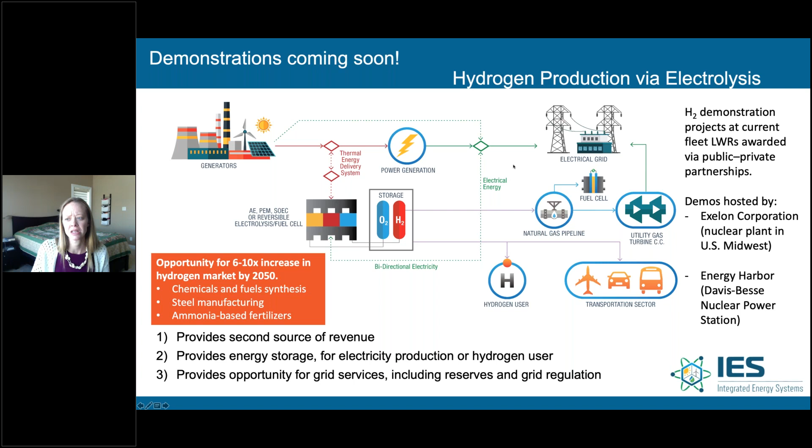So I hope that you are encouraged by that and that we will be able to hear lots of exciting things throughout these presentations. So one thing I want to start is thinking that what our energy systems can provide is really quite different than what we do today. Nuclear energy provides a vast amount of clean energy today. In the US, nuclear energy provides 55% of the clean electricity in the United States, but it can do so much more. We can bring that abundant dispatchable energy into industrial applications as shown here on the right.

We can bring that to production of clean water and make a desert oasis, or it can be taken to remote applications or regions that need energy but don't have ready access to the standard grid, don't have ready access to a number of different facilities that rely on diesel shipments from time to time. So I invite you to open your minds to that in how we can think about energy system planning in the future and how nuclear can and should play a role in that.

So with no further ado, I'd like to introduce our first industry speaker who will open this session on nuclear industrial integration demonstrations. I'd like to welcome Dr. Ugi Otgonbaatar, who is a corporate strategy manager at Exelon Corporation. Ugi joined Exelon in 2016, and since then he has been working for Exelon's corporate R&D partnership program, focusing on early stage energy technologies, including clean hydrogen generation, energy storage, and technologies for repurposing the existing nuclear fleet. Ugi holds a bachelor's and PhD in nuclear science and engineering from MIT, with research experience in thermal hydraulics, computational materials science, and he's previously worked for R&D groups at EDF, General Electric, and Tokyo Electric Power Company. Ugi, I'll hand it to you.

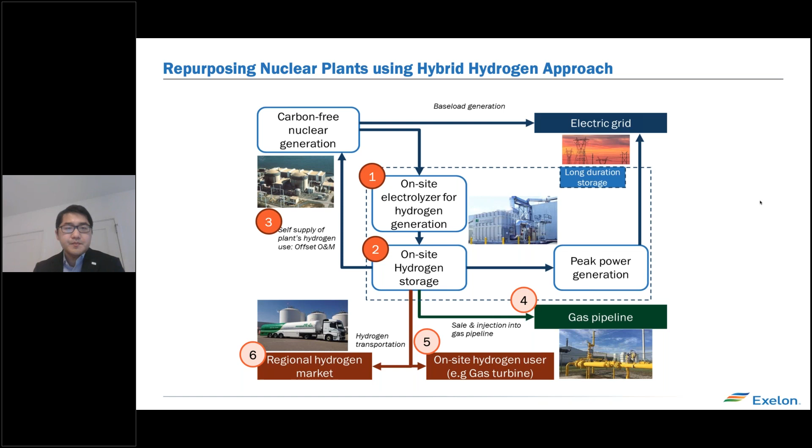So yeah, we have taken some steps to explore this vision. So number 1, 2, and 3. So I talked about self-supply of hydrogen. So what we are doing, with DOE funding and 50% cost share from DOE EERE, and working with this company called Nel Hydrogen and 3 of the national labs, we are installing a 1 megawatt electrolyzer at one of our Exelon units. So that project is going along very well, and we are getting close to site selection at this point.

And Shannon asked me to touch on safety. So again, we haven't selected the site, but based on preliminary analysis, it looks like the amount of hydrogen we'll be adding to the site is going to be minimal because the electrolyzers don't store a lot of hydrogen. So right now, the current strategy is to design the system such that we don't need a license amendment review from the NRC. So that's our current strategy, and the unit is expected to be running in 2022. Next slide, please.

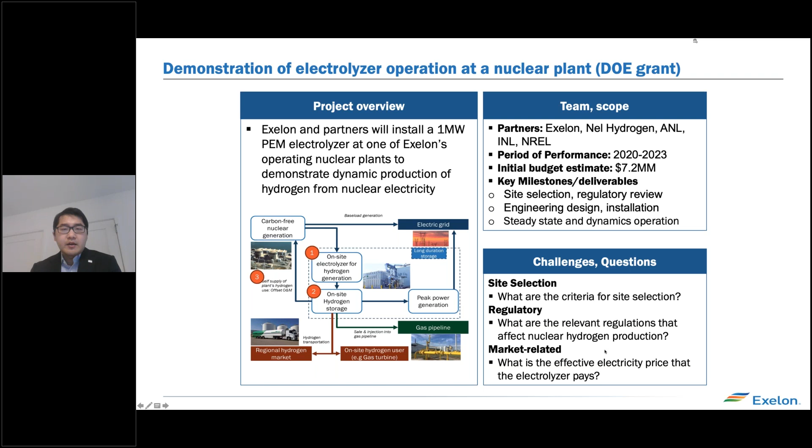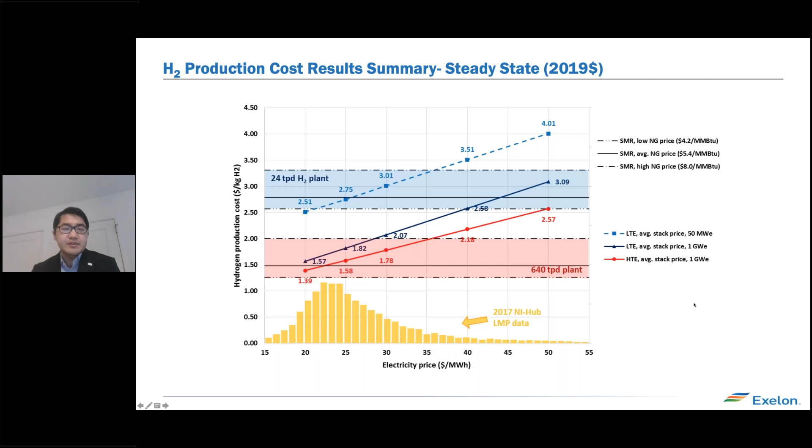Thank you very much, Ugi, for introducing us to that project. It is definitely an exciting project, and I'm really looking forward to seeing where it takes us. Our next speaker is going to talk about another project to use nuclear energy for hydrogen production. They're taking a little bit of a different approach relative to Exelon.

So I'd like to introduce Alan Scheanwald from Davis-Besse Nuclear Power Station, which is owned and operated by Energy Harbor, which was recently First Energy. Alan has a Bachelor of Science from The Ohio State University, where he majored in mechanical engineering and minored in nuclear engineering. Alan currently works as a project manager in the strategic engineering department at the Davis-Besse Nuclear Power Station. And he has worked there since 2011, and he's been in this role since 2014. Alan is the project manager for the Light Water Reactor Integrated Energy Systems Interface Technology Development and Demonstration.

Alan, welcome. Hi, good morning. Hi, thank you for having me. That's a pretty good intro. I feel like I don't really have anything to add just about myself, so thank you very much. If you go to the next slide, please.

All right, so I will be speaking today about our project to install a hybrid energy system that is capable of automatically diverting electricity from a nuclear power plant, namely Davis-Besse Nuclear Power Station, to a low temperature electrolysis hydrogen generating skid to create hydrogen. The objective of this project is to diversify and increase the revenues of nuclear plants facing increased competition from renewables and low-cost natural gas. I'm sure that line or something like that line will be parroted many times throughout this webinar today.

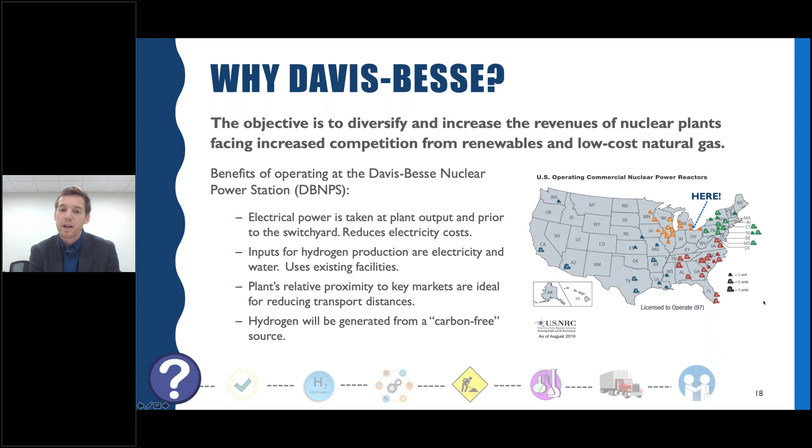Our plant's relative proximity to key markets is ideal for reducing transport distances. Our location in Northwest Ohio is pretty well situated to some key major industrial hubs, as well as main transportation corridors, namely the Turnpike, I-80, I-90, I-75. And then the hydrogen that we'll be generating is from a carbon-free source. So that's something that we're looking to keep in operation, these carbon-free baseload electricity plants at our nuclear units. Next slide, please.

So this slide just gives an overview of where we are with the project in funding space. So we are still in negotiations to complete the award. Our project collaborators include Idaho National Labs and then 2 other utilities, Arizona Public Service and Xcel Energy, both of which will be presenting today. The project duration, once we entered the period of performance, is roughly 24 months. Next slide.

Talk about hydrogen skid selection. So the equipment that we will be using is low temperature electrolysis. It uses polymer electrolyte membrane technology. This is a proven technology. It's been used commercially and is available. So using a proven technology will minimize risk to the project. We're really proving the concept of integrating this energy system into an operating nuclear power plant. So we're looking to be able to remove risk where we can.

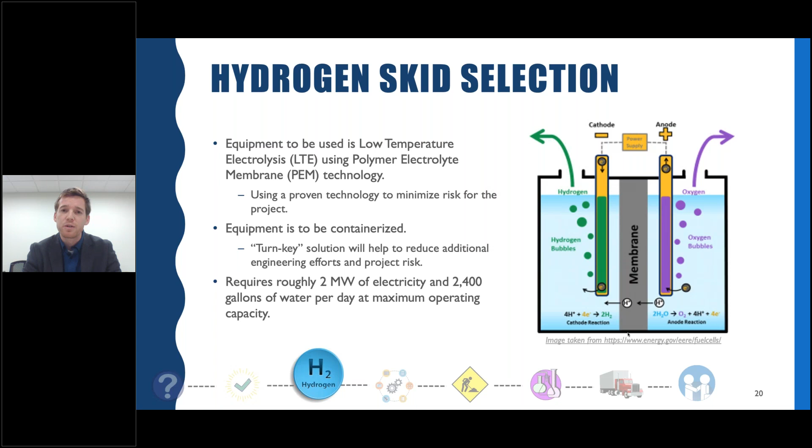The equipment is to be containerized. That will allow us to have more of a turnkey solution. And that will also allow us to reduce the engineering efforts and then have a quicker implementation timeline than if we were constructing a new building, a new system from scratch. The skid itself that we're aiming for will use roughly 2 megawatts of our electrical output and consume roughly 2,400 gallons of water per day at maximum operating capacity. Next slide.

This is just a quick overview of the modification process that we will take at a nuclear power plant. So the biggest portion will be the analysis. We want to ensure that the effect the skid and the supporting equipment will have on the plant's operation is minimized, and we're going to have to address the design and licensing basis considerations.

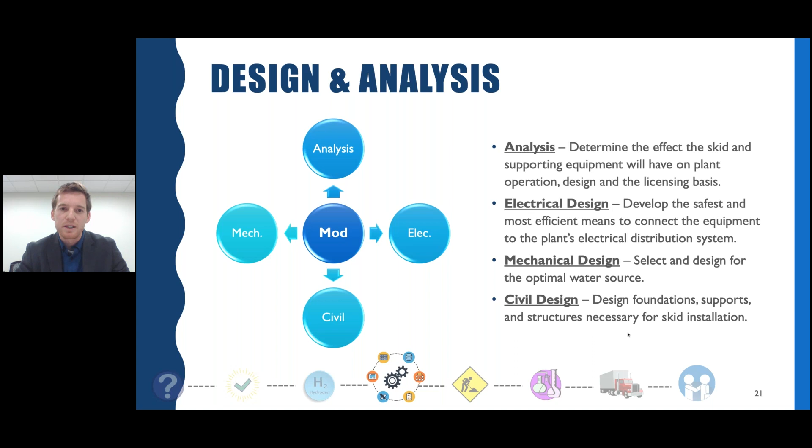Ugi had a good point about trying to limit the amount of hydrogen that is on site. That is also something that we are looking to do by having minimal on-site storage and quick transportation off-site be a part of the project. And I'll touch a little bit more on my next slide about that. Other aspects, the electrical, the mechanical, and the civil design will all be kind of integrated to tie everything up and ensure that we're doing what we are in the safest means possible. Next slide, please.

We're opting to design and locate the equipment such that the effect on the site is minimized. Just in terms of any sort of storage, albeit minimized to the extent practical, we're looking at siting it as far as reasonably achievable from the power block, just to eliminate as much of the concerns as possible. So, like I said, storage and transportation are going to be the items to be addressed. We do not foresee any issues with potential amendments to our license. However, that is all going to be addressed in the modification process. In addition, we're trying to design our electrical tie-in such that the effect on the plant is minimized.

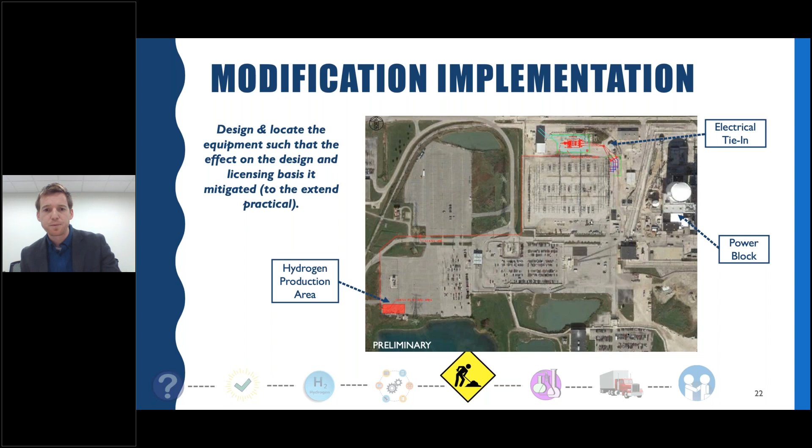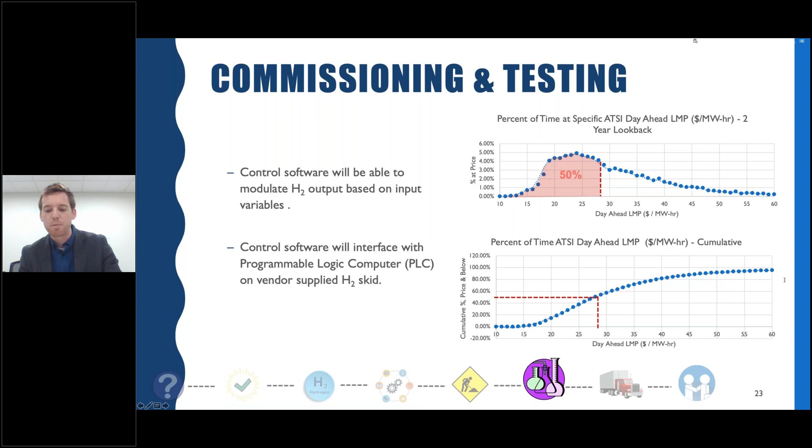So transport and consumer base. We are looking at creating, collecting, compressing, storing, and then transporting hydrogen off-site as part of this project. So since we will be creating hydrogen for consumption, we need to identify existing markets in the area. Like I mentioned earlier, our proximity to key industrial centers is a benefit of the project. However, there are existing hydrogen markets, and we also need to help cultivate the emerging markets.

There's a lot of excitement out there as to what could come, and we're looking to get into that excitement. So what we're doing is trying to leverage some local and regional partnerships for that, given our transportation distances being relatively small for some key industrial centers. We do have a publicly available technical economic assessment for the area that shows industrial users of hydrogen and potential bulk hydrogen generation scenarios that are out there.

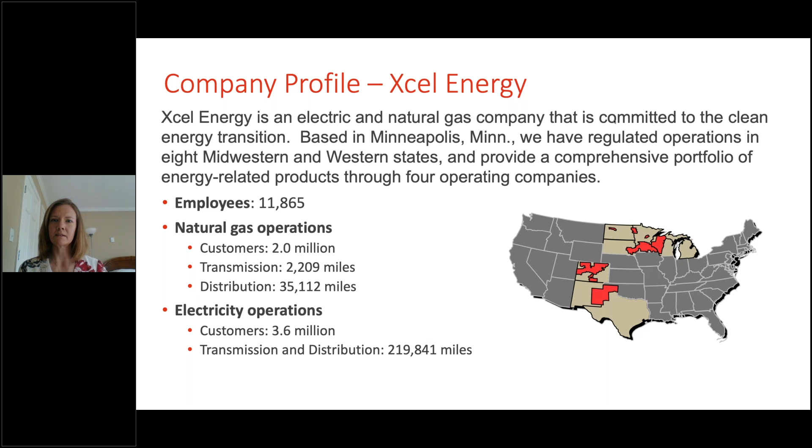So in 2018, we made a very bold statement regarding carbon emissions as a company. We have bold plans by 2030 to reduce our carbon emissions by 80%, and our vision by 2050 is to be 100% carbon-free. We were the very first large utility to announce such an ambitious vision. And we are working towards ways to meet those 2030 and 2050 goals. The path through 2030, we have a good solid plan. We understand how we will get there. But 2050 is a little more up in the air, and we're still working through that.

We do need nuclear in the portfolio to meet the 2030 goals. Right now, our units are licensed to operate within the extended period into the early 2030s. We are exploring and potentially applying for an extended license, but that commitment has not been made yet. So we're still in the preliminary legwork of determining if that's the right path forward for our ratepayer here in Minnesota. For 2030, we have put out a proposed Upper Midwest Energy Plan, and that sets our path on how we'll achieve those milestones. We do view hydrogen as a potential way of meeting those 2050 goals, and that's something that we want to incorporate into our integrated energy system plan. Next slide, please.

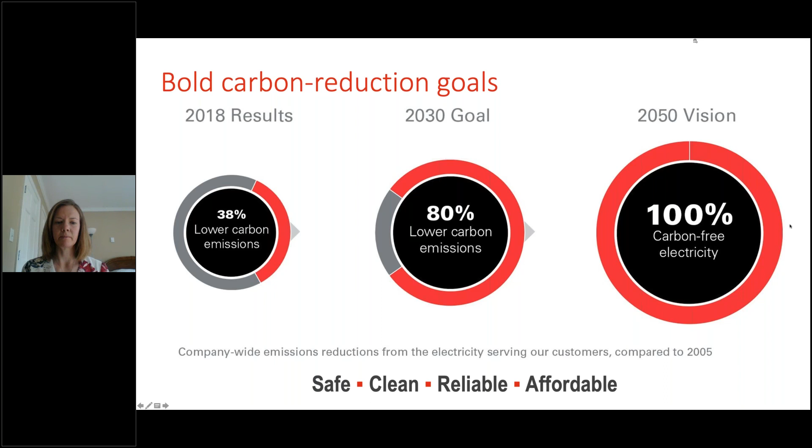So here in Minnesota, we've got a wide variety of generation sources. We have windmills, we have nuclear, we have solar, and we have hydro. And based on congestion and planning within the Minnesota region, we are finding that having the ability to operate flexibly is something that the nuclear plants can offer to the market. And that helps us work together with renewables. Our focus with Xcel is to work together with renewables and not compete against them. So what used to be viewed as a baseload power source, which nuclear is a baseload power source, we're showing that we can operate flexibly.

And what that means is that both plants are operating in the day-ahead market, and based on energy needs, we can be asked to ramp down to 80% power. All 3 units with Xcel are on the day-ahead market, and here in the spring and the fall when the energy is swinging, and we're also seeing impacts from people working remotely and the coronavirus results, we are definitely operating flexibly more often.

So this is something that we are offering to help benefit both the renewables and nuclear and working together, whereas previously we would have been just a 100% power source. That begs the question of what do you do with that extra 20% if we are regularly going down to 80%? And that's where hydrogen comes into play. Could we use that extra 20% instead of just downpowering, divert it to the hydrogen skid and create hydrogen for green energy consumption later down the road?

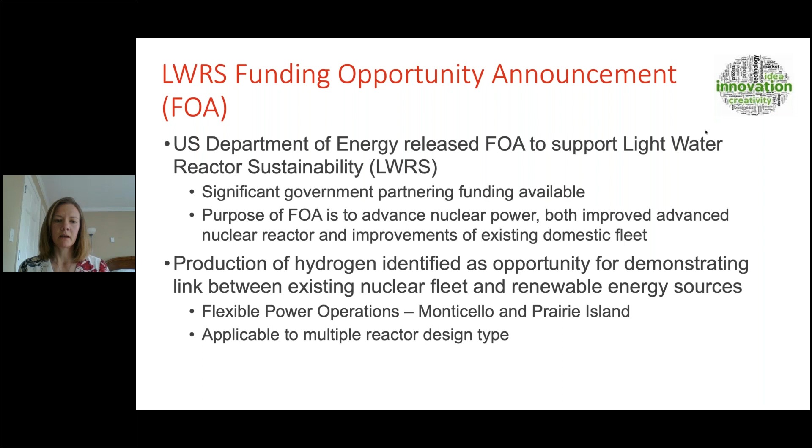So high temperature electrolysis is a more efficient process. You get almost a third more hydrogen when you utilize steam to produce the hydrogen. And it plays well because we have the large secondary side on all of our units. And it would be something that we could offer that's different than renewable sources with just an electricity source. Next slide, please.

So as I mentioned, we are an industry consortium with 3 utility partners in the national lab. As part of the project that is going at Davis-Besse to do the 2-megawatt demonstration, Xcel's project scope is a technical economic assessment. So we're evaluating our future electric and hydrogen markets to determine the potential. We also are different because we're regulated. One of our plants is also near an Indian community, and so we've had some public relation type issues to work through in addition to the Public Utility Commission for Minnesota.

In addition, the 2030 and the 2050 goals for carbon-free generation, we want to figure out a way that we could use hydrogen with our nuclear plants and really further that green, clean, carbon-free nuclear energy system and work with renewables in the future. And we're really excited about pioneering a new area. Nuclear is viewed as 100% baseload power, and we're learning that we can do so much more with our technology. And this really would pave the way for advanced nuclear reactors and identify ways of thermal extraction or ways to use the energy in different manners rather than just produce electricity.

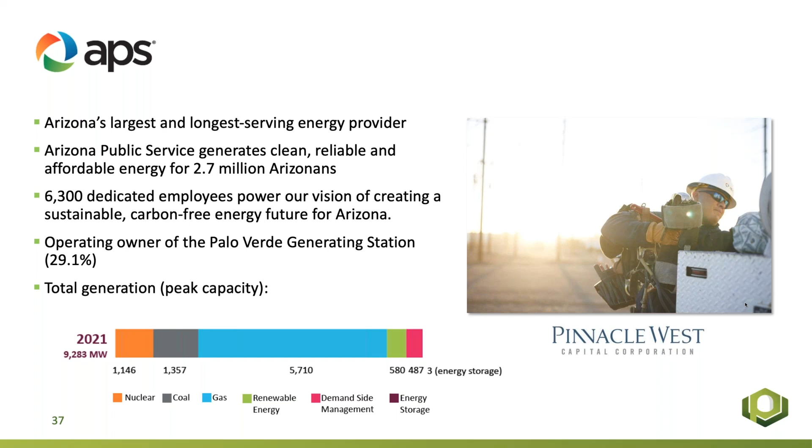We certainly don't compare when stacked up against Exelon or Xcel in terms of peak generating capacity. For 2021, we're somewhere around 9,300 megawatts of peak capacity. Part of that is our nuclear power, part is coal, which we'll talk about shortly. And then most of our generation right now is gas. Next slide.

So while we don't stack up relative to total generation or generation capacity, we do have the largest nuclear power plant presently in the United States. We have nameplate capacity of about 4,200 megawatts electric. It's a 3-unit plant, and we have 7 participating owners, one of which, of course, is Arizona Public Service.

So the owners receive power, and that power is distributed to 4 states, Arizona, California, New Mexico, and Texas. It's a very good operating plant. We typically produce between 31 million and 32 million megawatt hours of carbon-free energy each year. Next slide.

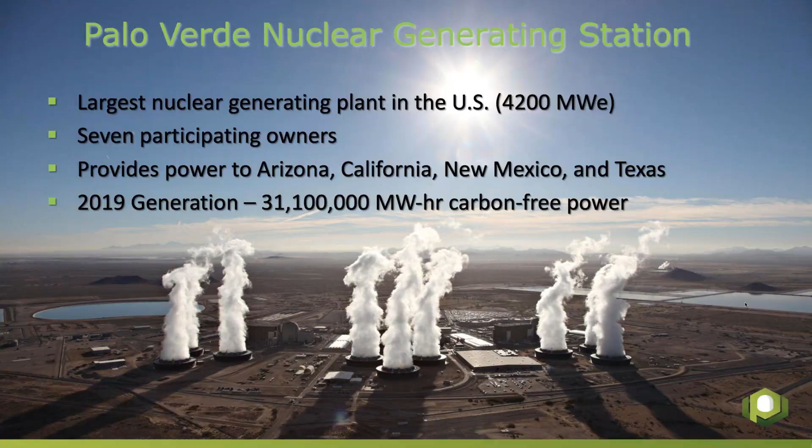So here in Phoenix and in the desert Southwest, we do have a lot of increased renewable generation. It continues to grow, in particular solar. And then on a day like we have today, where it's absolutely beautiful outside, 72 degrees, and the fact that a lot of people are home, as Molly said, telecommuting instead of in their places of business, we have a lot of solar generation and very little demand.

So this increases the impact or the pressure on Palo Verde to curtail power output so that we can balance the system. So we have 7 owners, and each owner has a different business plan and a business objective, and they use the power and need the power in different ways. So the possibility of curtailing power, it can happen, but it's highly non-desirable at this time. So we are looking at alternatives to power curtailment.

And a couple of years ago, we started talking with Shannon and the Integrated Energy Systems Program and became very interested in this particular approach as an alternative to curtailment, but also realized that production of non-electric commodities such as hydrogen or ammonia or others could also provide for other market-related opportunities. Next slide.

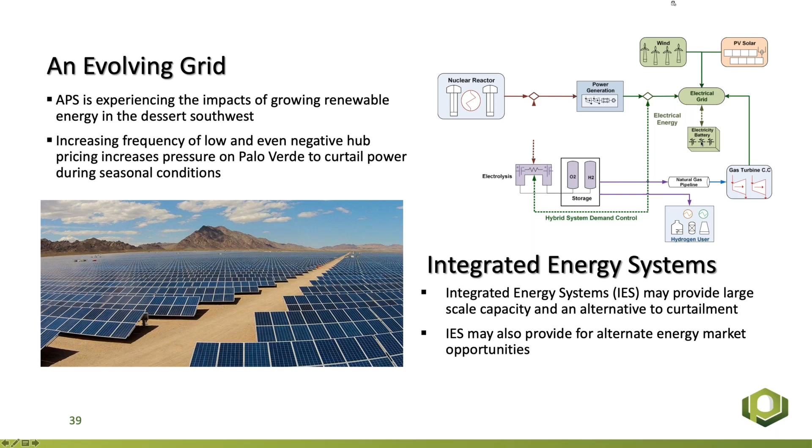So, in addition to the effects of renewable energy, APS too has announced our clean energy commitments, and much like it is at Xcel, we have a carbon-free goal by 2050. The path is not completely clear as to how we get there, but it is very certain that Palo Verde is going to be a critical piece of that equation.

Closer in, 2030, we have developed our plan to achieve those goals. That will involve additional commercial development of about 45% renewable energy, and in combination with this, we're also going to eliminate coal by 2031. So again, a very important piece of all this is the sustained generation that we get from Palo Verde. Next slide, please.

So as far as integrated energy systems go, we've looked and we believe that hydrogen is the fuel and or energy carrier that makes most sense. And our project going forward is focused on the generation, the storage, and the use of hydrogen. Next slide, please.

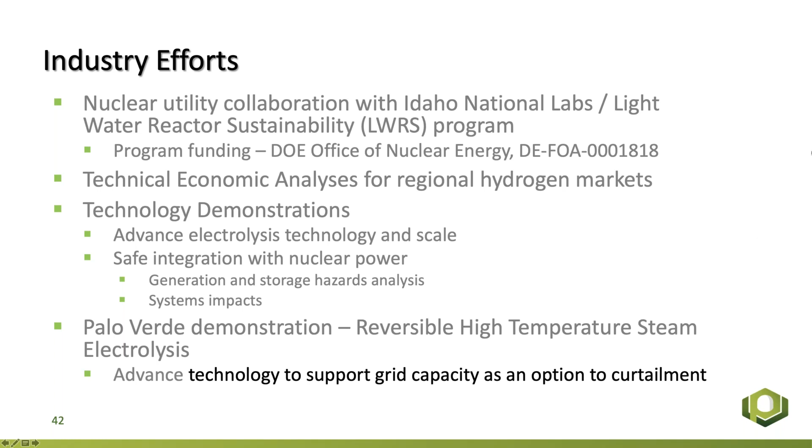So we envision, there we go. So we envision a reversible high temperature steam electrolysis system that's built on the same technology that Molly discussed, but it also allows for a reversible process where the hydrogen generated through this, we'll call it stack, could be stored in hydrogen storage tanks. And then when the market conditions are such that the price of power has gone up and we have a greater demand on the grid, gas from the tanks can then be pushed back through the same stack as if it were a fuel cell to put additional power on the grid.

There are other alternatives to this type of capacity related approach, but this is one that we believe holds promise, and our discussions with some of the manufacturers suggest that this technology may be ready in time, and that's what we're contemplating our demonstration to be based on.

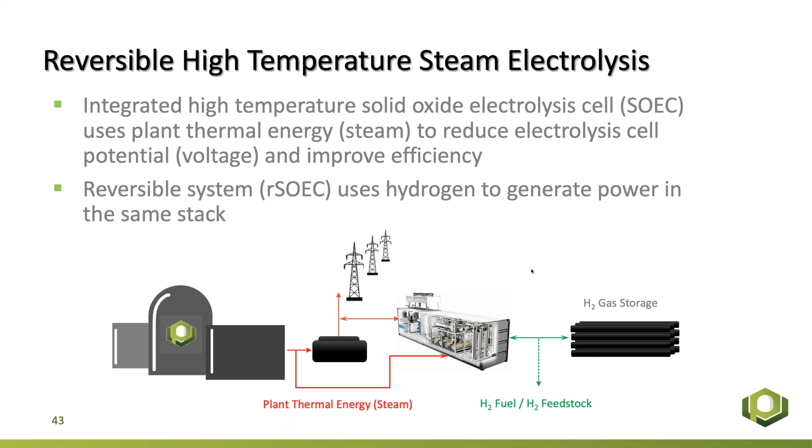So I'm also happy to announce that we've had a number of discussions amongst the Palo Verde executive leadership team, and a lot of excitement around the use of hydrogen, both in terms of capacity, but in addition, we as the APS fleet are looking longer term and trying to figure out what makes sense in terms of additions or replacements for our gas generation assets in order to achieve our long-term carbon reduction goals.

And the long-term vision that I have is that if we're able to produce high-temperature hydrogen very cost-effectively at Palo Verde, we're able to transport that or pipe that over to the Red Hawk plant, and we could use that as a clean, carbon-free generator when demand needs it.

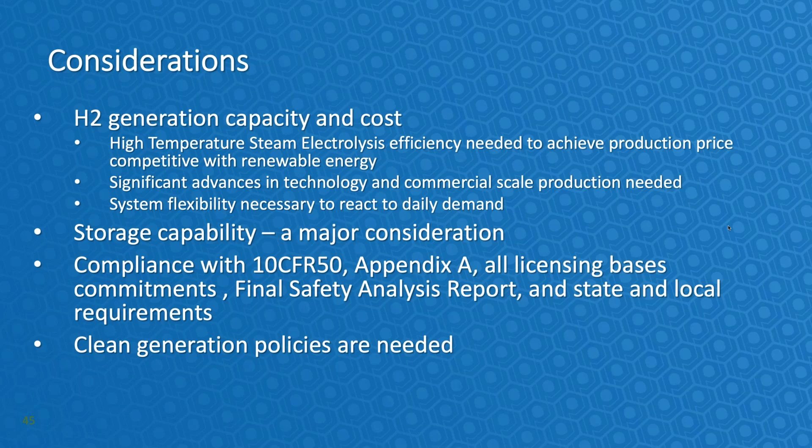As Oogie and Alan and Molly all stated, these integrated systems where we're placing hydrogen in and around nuclear facilities raise a lot of safety concerns, but we need to ensure that we remain in compliance with all of our licensing and design bases. And the last point that I think particularly applies for these integrated energy systems is looking for policy that supports clean generation and can help bring price parity among all the different energy sources. So with that, Shannon, I'll turn it back over to you.

Thank you all so much for giving us insight to these really exciting projects that are being developed and that are moving forward to build these integrated energy systems. This is a really exciting opportunity for the nuclear industry, but industry in general, and that's really what we want to convey here. With so many cities and states and utilities and private companies seeking to reduce their carbon footprint, these types of activities are so incredibly important in injecting clean energy into these processes.

We are going to pause here for a moment to address some questions that have been coming in, and you guys are great. We have so many good questions that have come in, and so I'm just going to select a few here and there and maybe remark on a few of the comments.

One that I did want to personally address was a comment with regard to hydrogen fuel cell vehicles, buses, forklifts. Absolutely, these are out there, they are available, they are being used. However, when we take a step back and look at where that hydrogen is currently coming from, most of that comes from steam methane reforming, methane cracking, where they utilize fossil fuel combustion to provide the heat to drive those processes. And then in the methane cracking itself, it emits CO2. So these processes are by no means clean.

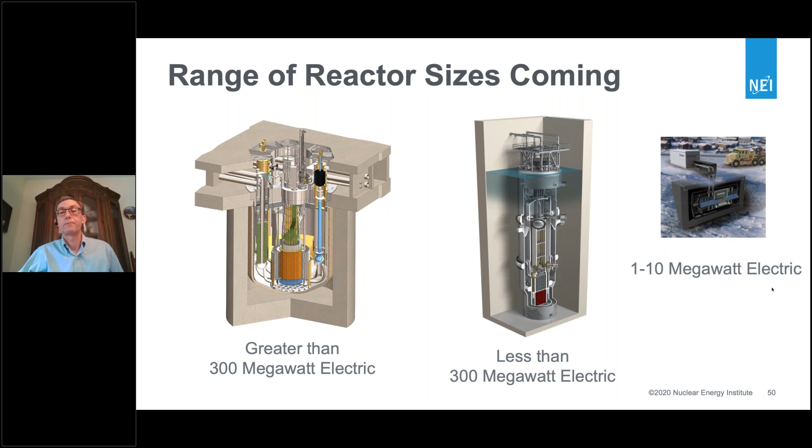As I mentioned, the design certification application is under review with NRC right now, and approval is expected at the end of this year. The design certification really means that NRC is going to approve the design, and then a company, a utility, can reference that design when they decide to go forward and build it. And on that front, we have a project, the Utah Associated Municipal Power Systems, looking at NuScale and planning to build that at the Idaho National Laboratory site.

UAMPS is currently a municipal utility that does not have nuclear generation capacity. So this is great because they're looking at expanding into nuclear as part of their clean energy portfolio. And in fact, this is part of their Carbon Free Power Project. And they already have a site use permit for property at Idaho National Laboratory, and we would expect that plant to be operational around 2026.

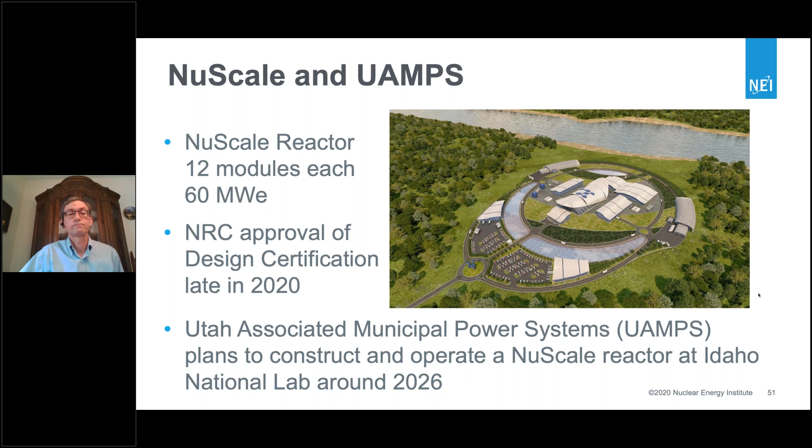And then looking at the possibility of a mobile microreactor. So a microreactor that can be transported easily, moved into a location, set up and become operational within a few days, and then when the mission is completed, taken down and shipped out within a few days as well. This also could be great for disaster relief in certain areas where you lose a lot of power and you need to bring in some power. A mobile microreactor could have the possibility of doing that.

And also then thinking about microreactors in other locations, they have the potential to be used very well for, say, mining applications or other things where you don't have ready access to the grid and you need to bring in power there, and bringing in electric power from the grid is just not doable.

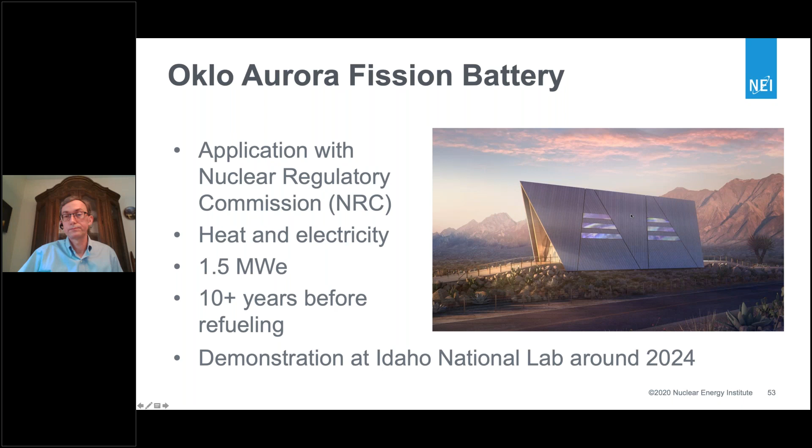Thank you very much, Everett. I appreciate that little glimpse of what is coming down the line and when those advanced reactors may be available to meet the needs of so many of these applications. And we'll have a later webinar that focuses in on some of these technologies to dive a little bit deeper into that area.

This time, I'd like to welcome our last speaker for this webinar, and that's Dr. Andrew Sowder. Andrew is a senior technical executive in the Advanced Nuclear Technology Program at the Electric Power Research Institute, or EPRI. Andrew leads EPRI's new advanced reactor portfolio and previously coordinated R&D on light water reactor accident tolerant fuel, and also managed applied research on used nuclear fuel management and advanced nuclear fuel cycles. So Andrew, I will hand it to you. Welcome.

Thanks, Shannon. And I will have a mercifully short presentation, mainly focused on touching on 2 general themes and topics, I think, to close out at least the presentation portion of today. Next slide.

So really what I wanted to speak to from a perspective at EPRI, since we are an end user facing organization, we are chartered for public good research, but we do that through supporting primarily electric power utilities in the US and around the world. And we touch on or interact with about 80% of the world's nuclear operators. In the United States, every nuclear operator is a member of EPRI. So from that perspective, I wanted to start with the first theme I think that's important to keep in mind about the future of nuclear and its role and really its importance. Next slide, please.

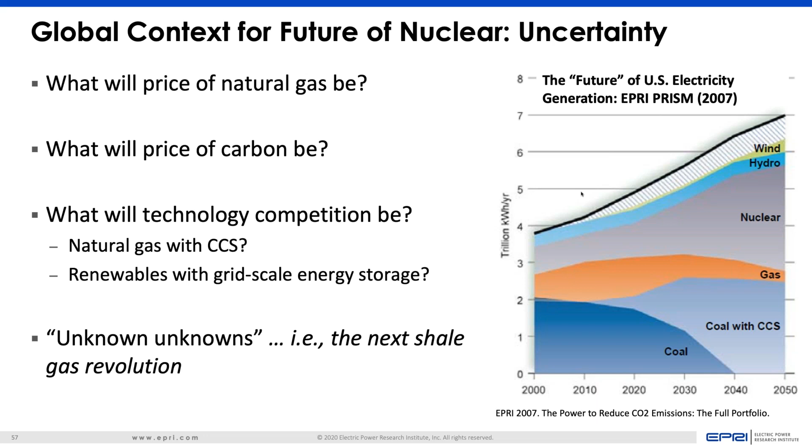Next slide. The second theme I wanted to touch on was the idea that it's really important to understand what a customer, in spite of that uncertainty, might want and need based on what we have learned with over 50 years of operating nuclear power plants commercially. These are really self-evident, but I think it is useful to put them out there for perspective purposes.

First of all, what's required for commercializing an advanced reactor or any technology or product is it's got to be mature. So in the area of nuclear, we need demonstrations, and that's the direction we're moving in. So very positive outcomes. Those technologies also need to be compelling in that they really need to offer new attributes and capabilities relative to the current technology. Otherwise, it is really a hard sell to conservative businesses like large utilities. Why should they take the chance on a new technology when we already know we can operate nuclear power plants safely, reliably, and economically, even in a competitive manner?

And then lastly, obviously, just because it's a shiny new technology doesn't mean it's not subject to the rules of the road in terms of being competitive. If it's going to be commercial, these technologies do need to compete, and given the uncertainty, they likely need to compete on a robust basis, regardless of policy, in many regards, out to the future. So cost and value from products, reduced costs in construction, well-defined deployment timelines, and certainly the idea of providing new access to markets and products is an important one.

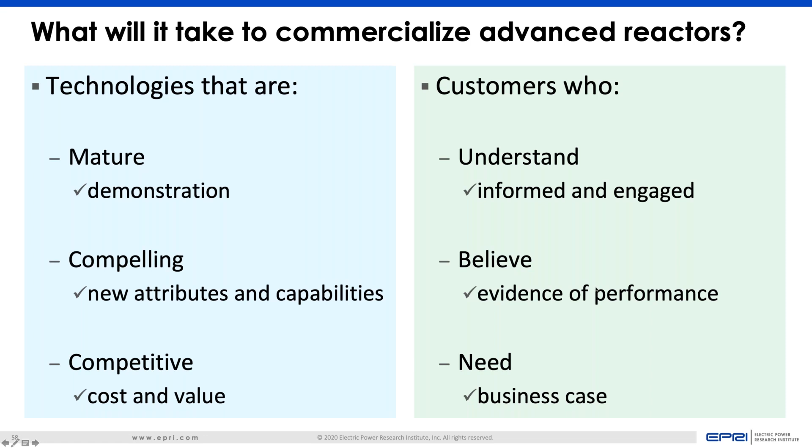So next slide. And last slide. Okay, so that brings me to, as I promised, a short but sweet presentation, kind of a summary of these two perspectives brought together. So the technology developers really need to understand customers and markets for their products. And perhaps even more importantly, the developers and vendors need customers to begin with. They need to identify those customers. So again, that's why having utilities step up like APS, like Xcel, like Exelon, Energy Harbor, really offers a chance for them to understand what a potential future owner-operator wants and needs.

Now, the customers, for their perspective, and I say customers because owner-operators in the future may well be utilities, but also with alternative energy products, they may well not be. So customers and other primary stakeholders need to have an interest in understanding the technology landscape and what's coming down the pike. That's why there continues to be a need for outreach and ways for folks to understand. That's why the GAIN series of workshops and this kind of interaction is so important. But customers not only have a role in purchasing the technology, but in the nuclear space, it's really important to have early engagement from the customers from the standpoint of requirements to help inform the design process.